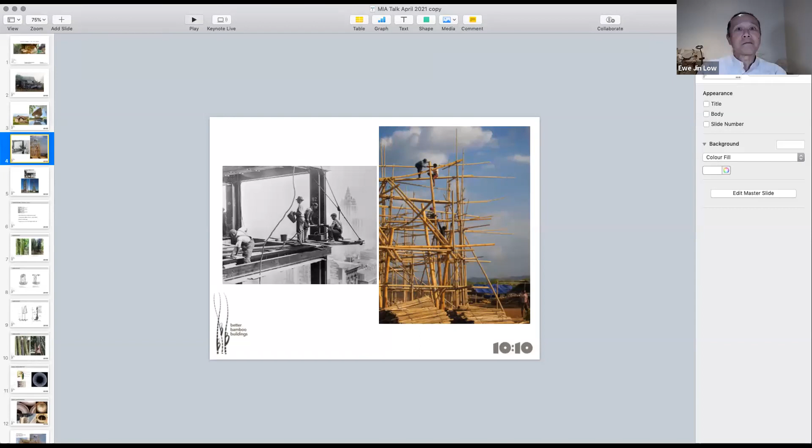I've had quite a bit of experience generally in the more conventional work in architecture, quite a lot of it. And my bamboo design journey started almost 6 years ago, so not long, but for bamboo it's quite long in general. So let me just go through this talk.

When we think of bamboo buildings, we think about buildings that don't last long. It's almost like poor man's timber. People think of bamboo as my grandfather's hut in the paddy fields that within 2 years will be rotten and dilapidated. So it shouldn't be that way.

I think attitude towards bamboo is changing a lot, and bamboo shouldn't be this hut that you see, but can be something like this where it's reinterpreted, it lasts longer than what it should, and it's beautiful.

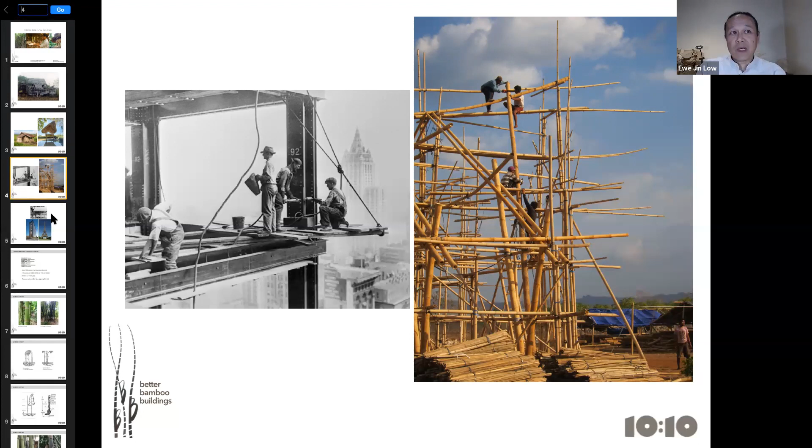Try and look for a bamboo book in any bookshop - it's very hard to find. So it is an emergent or re-emergent material.

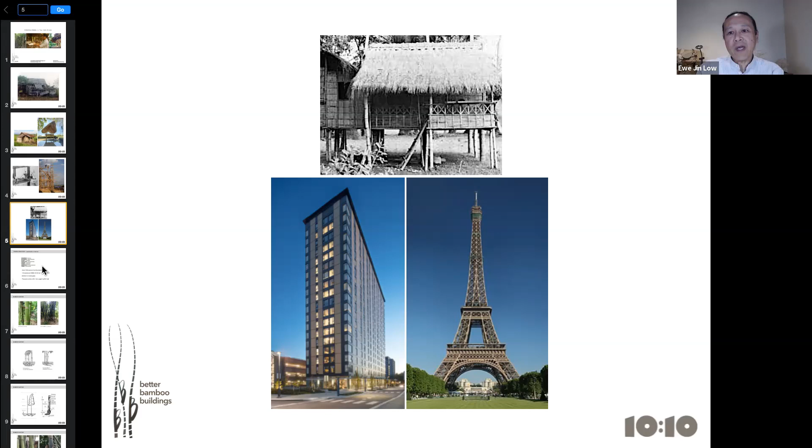A bit about bamboo in terms of what it is generally in the vegetable kingdom - it is actually not a tree, but a grass. Bamboo is a woody grass. There are about 1,500 species of bamboo around the world, and 120 are herbaceous, and quite a lot of it is woody, which means it can be used for timber. Some bamboos are short, 30 cm, and others are obviously like 30 meters high, which is 100 feet - that's quite high.

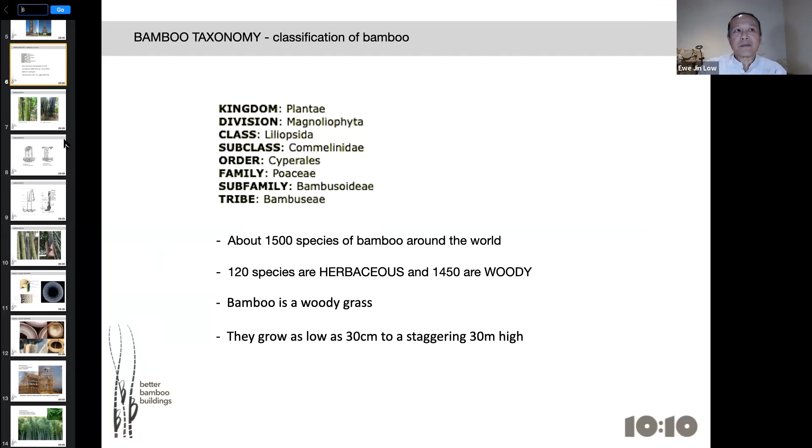So a bit about bamboo. This is a culm, or a pole - we call a pole of bamboo a culm. And when it's grouped together as a family, it's called a clump.

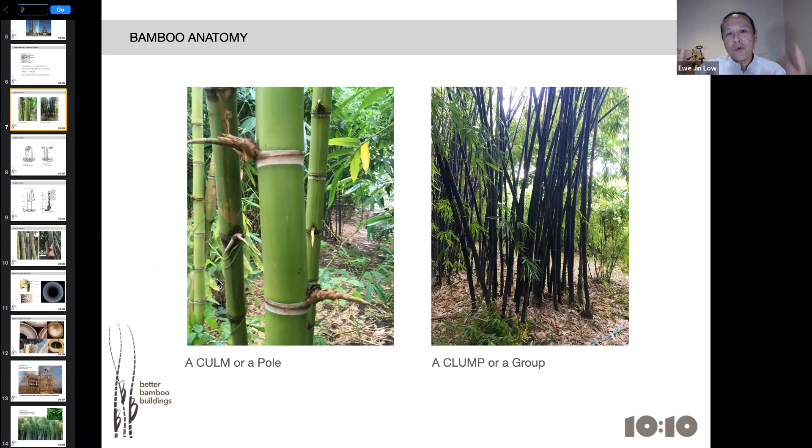There are two types of bamboo. There's clumping bamboo, which grows close together, and running bamboo, which goes wild - it goes under the ground, goes up even 20 feet away and comes up. So there are two types.

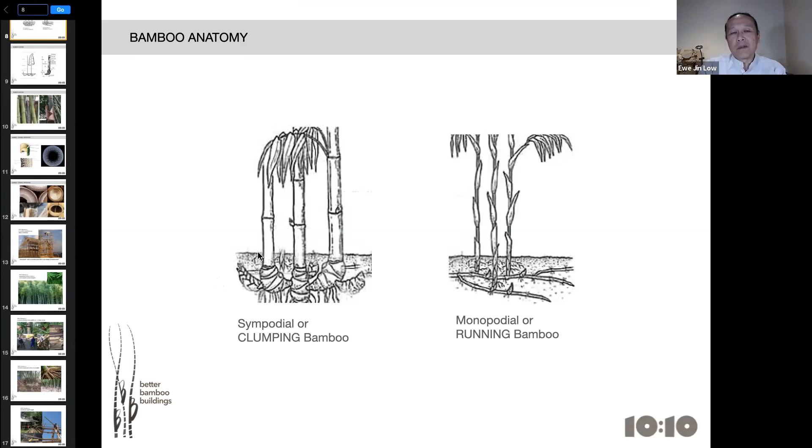A bit about the composition of bamboo. Going back a bit now - bamboo has roots called rhizomes. This is the bottom part and the middle part, and these two parts are where the bamboo is cut to use for construction. The top part is not so much. In between, we call them nodes - these are bamboo nodes, and there's a little diaphragm at each node.

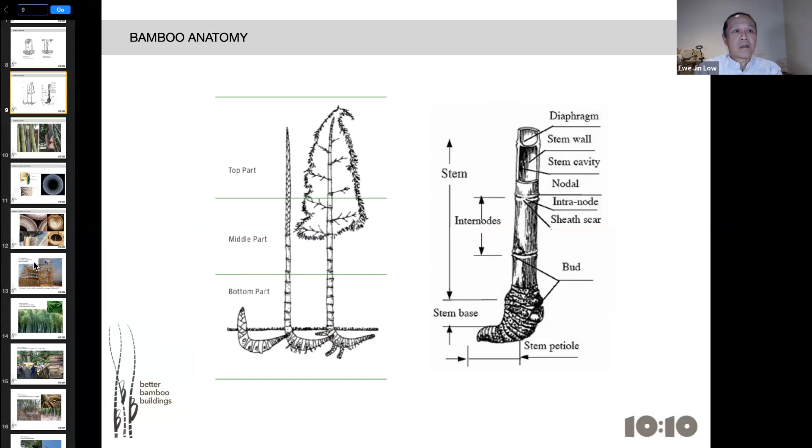The next part of the talk is really to go through and elaborate about why am I coming into bamboo of all materials. Bamboo is quite a worthy substitute for steel and for timber, not in all applications, but in some applications it is pretty good substitute. And I often ask students, how can we use bamboo in steel or timber applications? Think of that.

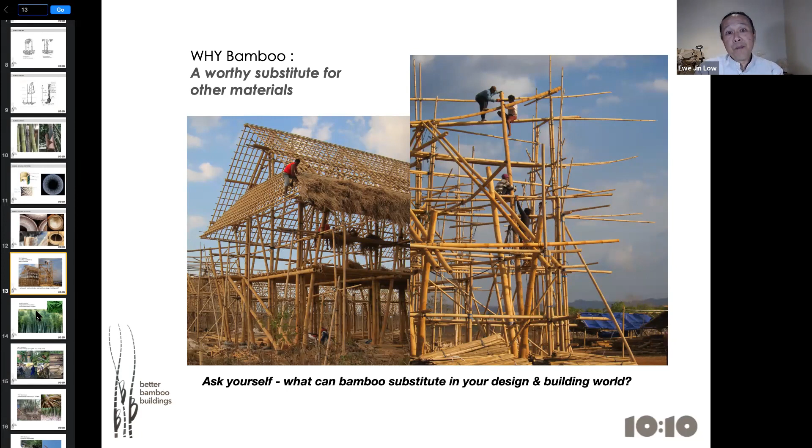Bamboo sequesters more carbon, grabs more carbon, and outputs more oxygen, kilogram for kilogram, when you compare it with timber. It really grabs - it's a good carbon store. It creates industry, creates business, and uplifts rural and non-urban areas, meaning from growing, harvesting, treating bamboo, from workers specializing in building in bamboo. It really uplifts poverty in many areas that I've seen as well.

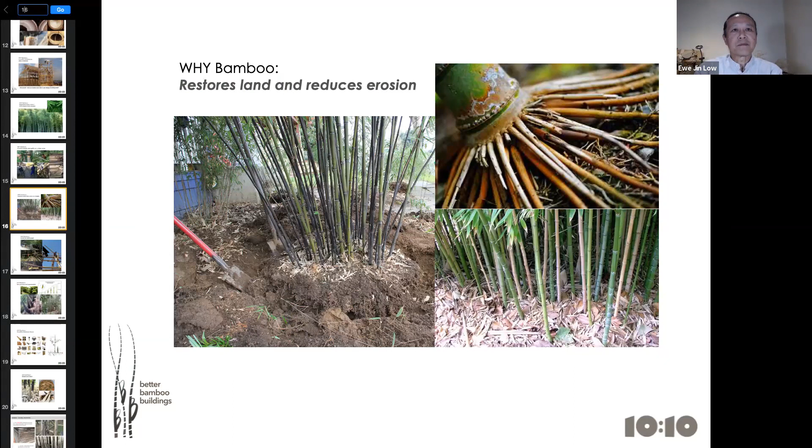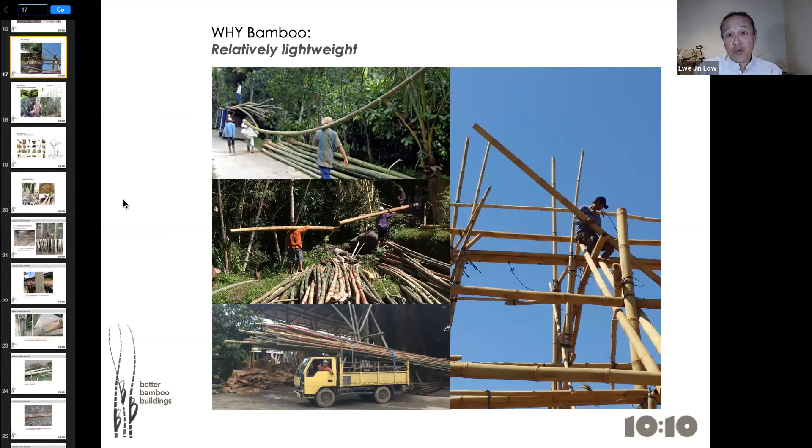Of course, bamboo is fast growing. It grows 1 meter a day for some species, and within 1 or 2 months is already at its full height, then it starts thickening up and getting stronger. It's got a very, very fast growth rate and is regenerative.

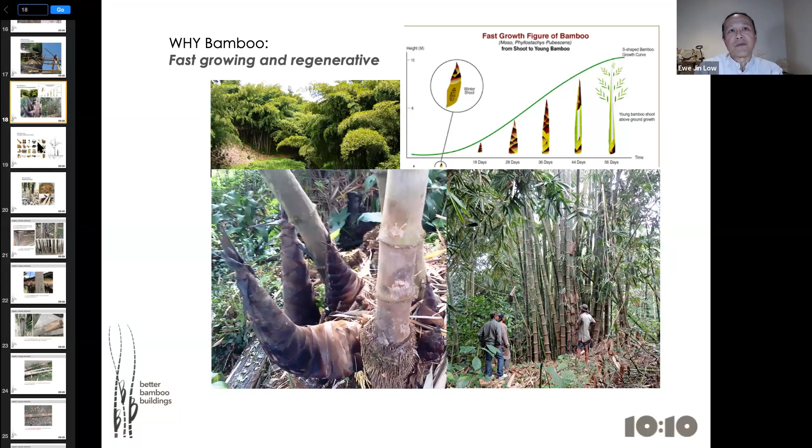Of course, it is versatile - it's got many, many uses, and every part of it, like the coconut tree, can be used. It is edible and tasty. For those of you who have tried bamboo shoots, you know - chicken curry bamboo shoot is amazing, tastes really good.

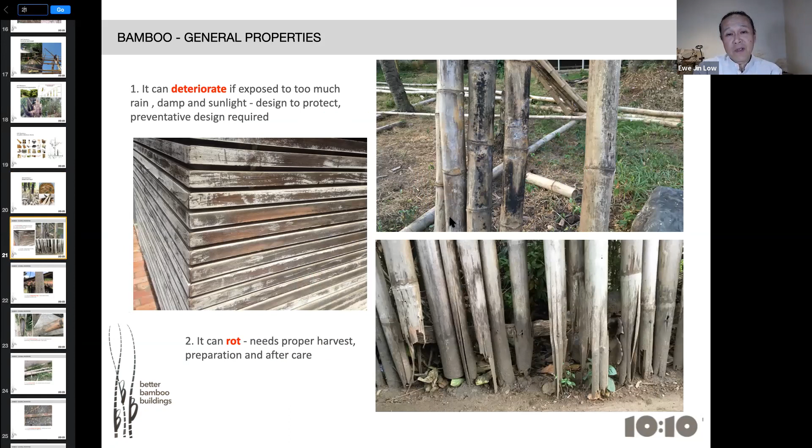It can be eaten by beetles and insects - they bore in and eat the insides of the bamboo, and within a year or 2, your bamboo building can collapse if you're not careful. So your bamboo needs to be treated - it cannot be used cut green and then put onto buildings. No, it has to be treated.

It is attacked by fungus as well. If you don't treat it or coat it, it can turn out quite bad, and your building or your installation can look really yucky. It can crack or it can shrink. It also can scratch. So you have to treat bamboo carefully.

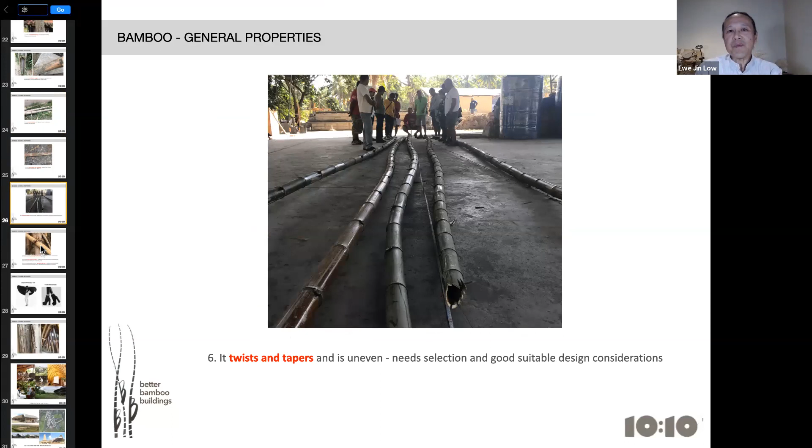As a building component, it is not always straight - it twists and it turns, so think about that when you design with bamboo. Sometimes when you harvest too early, or you harvest wrongly, it doesn't have the right strength to be built. So these are the precautions one has to take with bamboo, so that you're aware.

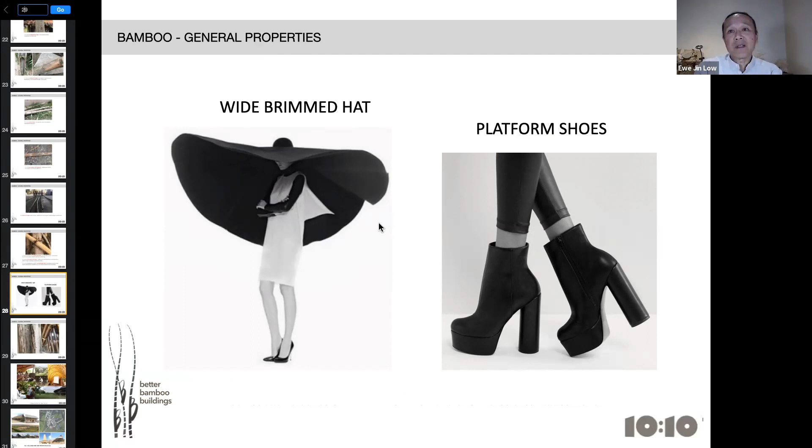When you design with bamboo, you need good preventive design, meaning you have to keep the water off the bamboo, keep the sun off the bamboo with a wide-brimmed hat, and keep bamboo off the ground and off water, meaning platform shoes to lift the bamboo up. These are basic principles of design for bamboo buildings, which I teach in my design course. If you do it right, you get nice bamboo that's protected and beautifully coated, lasting a lifetime. If you do it wrongly, you get insects eating it, fungus, and it rots.

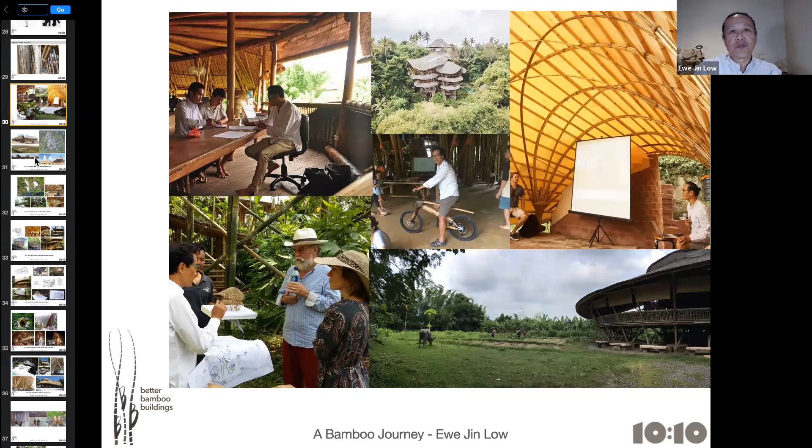Now I'm going to spend some time going through my bamboo journey. It started in Bali, where I joined a company called Ibuku, a pretty prominent bamboo design and production company. This is our office, with no walls, no cars in the car park, only buffaloes. I joined as lead architect and had a really good experience for 3.5 to 4 years working with them, designing schools and luxury houses from bamboo.

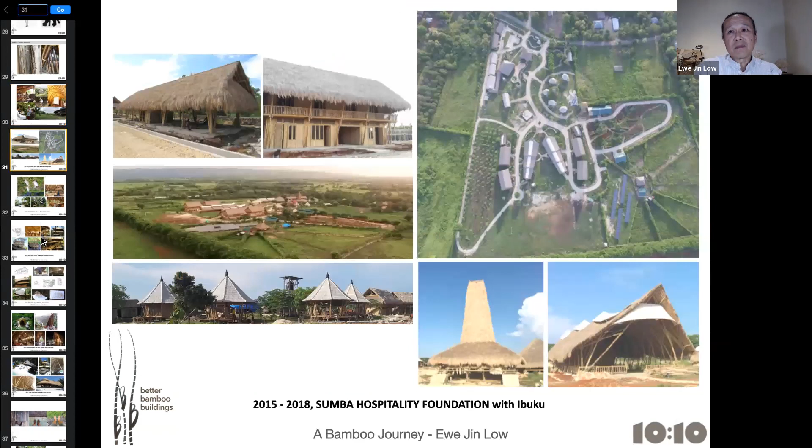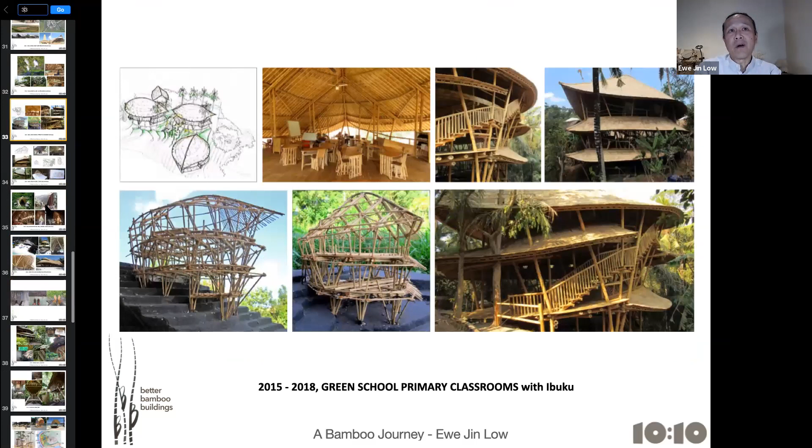These are classrooms in the Green School, going through all the buildings I was involved in. This is a science lab, all in bamboo, almost 100% bamboo.

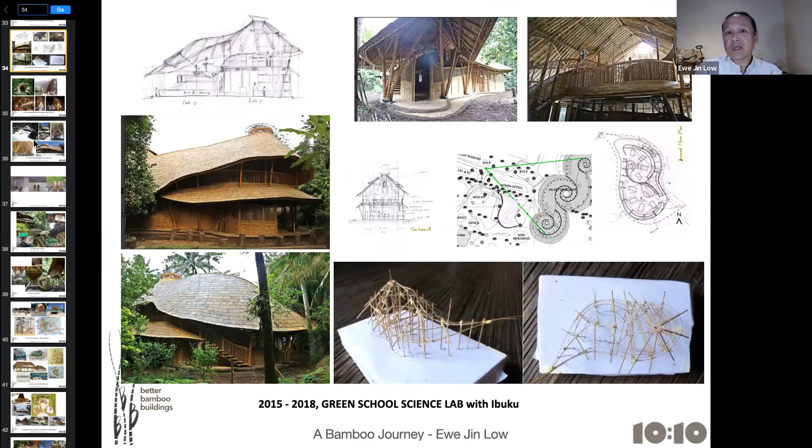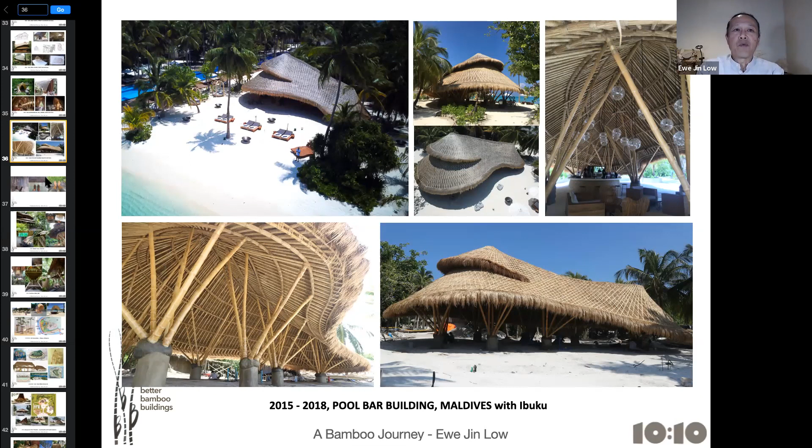I built our own house in Bali, which was a good experience. We still have it and someone is taking care of it, but we stayed there for 2 years. It's open, it's got no walls, we run a fan, we don't have an aircon. It's a very cooling, very permeable house.

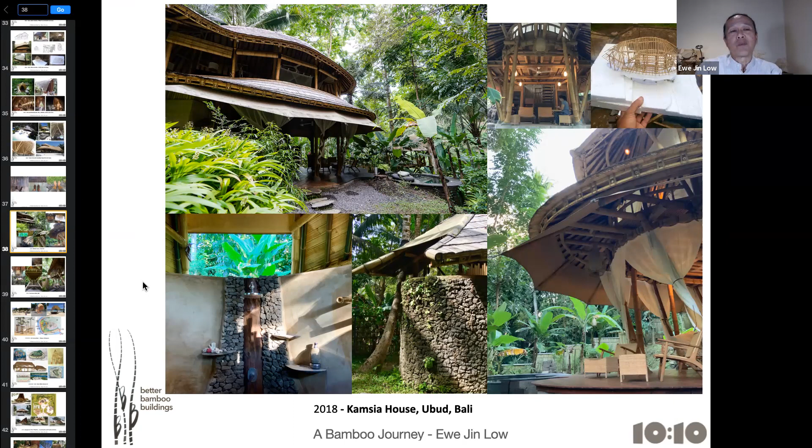Next to that house, we also built a tree house, again with no walls, overlooking a river below. A very simple building from the offcuts of the house.

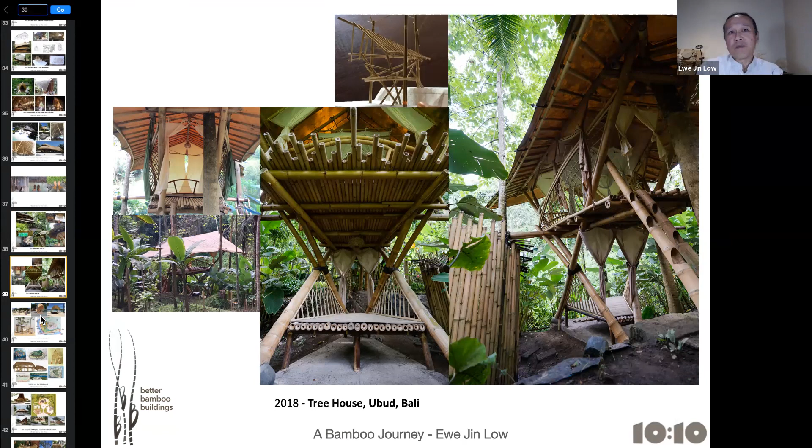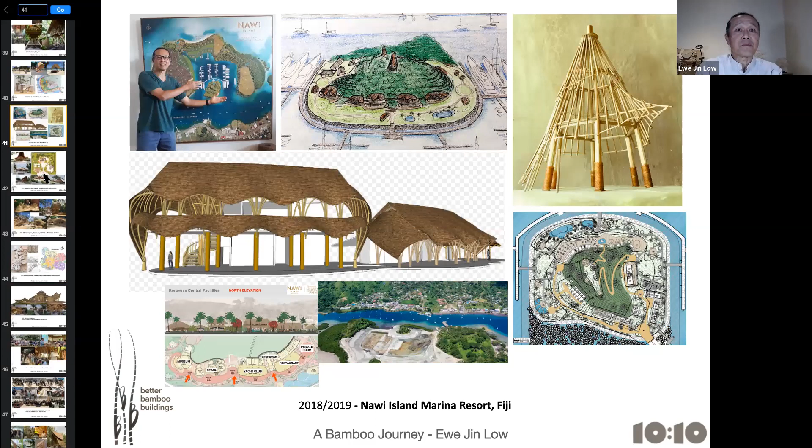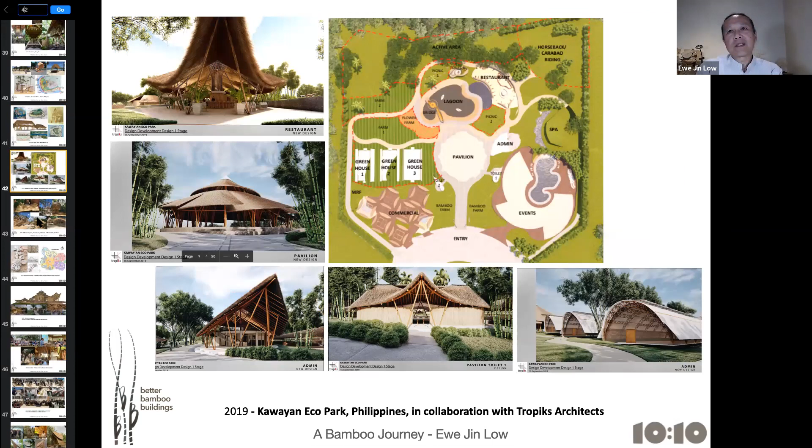In my work after leaving Ibuku, about 2.5 years now, I worked on bamboo resorts in the Philippines, some work in Fiji on a marina resort in bamboo, which was interesting. In the Philippines again, an eco park working with another architect, some resorts in Bali, small bamboo resorts, and a restaurant in Medan that's now going through detailed design.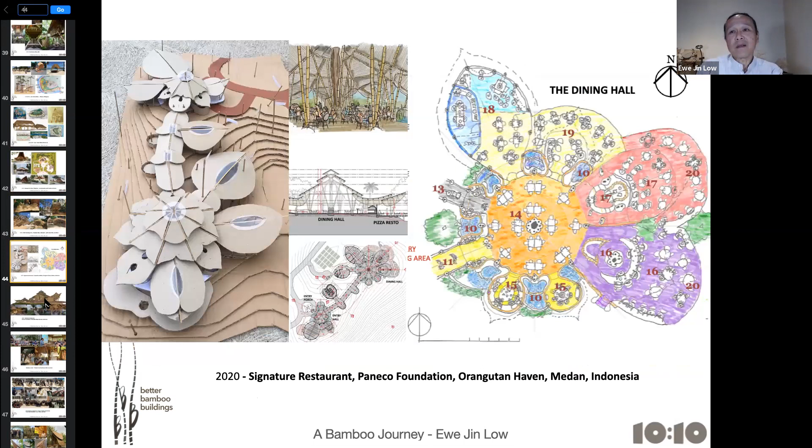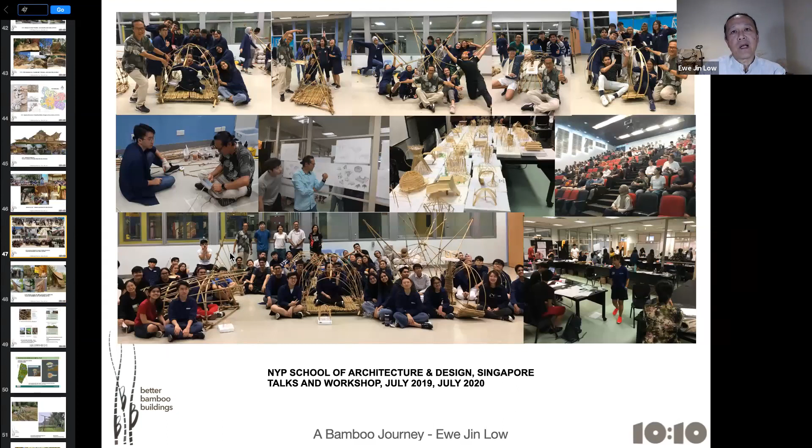I also teach. I began teaching at Bamboo U, quite a prominent bamboo learning institute now, and after 5 years it's grown a lot. I still help facilitate there, and I'm also involved in teaching at some universities here and there. As Nicholas mentioned earlier, I went to the KLAF Festival and was invited to build this pavilion in 5 days. It was quite a challenge, but we built it with volunteers and Balinese workers I brought over with me from Bali. It's up there at APW in Bangsar, so if you're going for coffee you can see it.

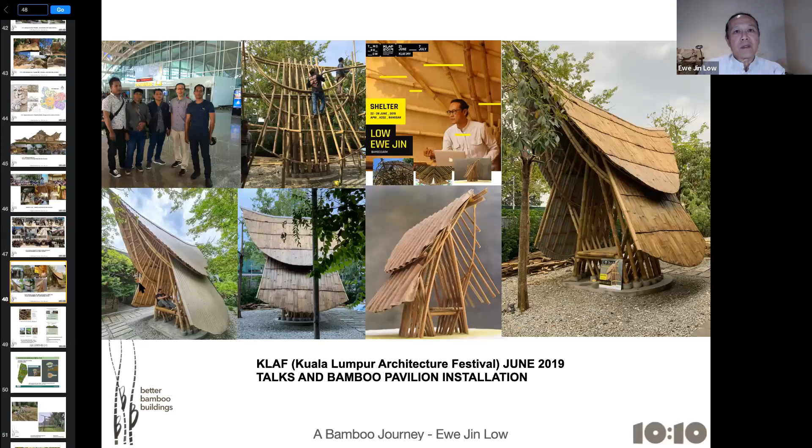Just some of my channels, Instagram, 2 Instagram channels, and a blog, Better Bamboo Buildings. If you want to come and visit, it'd be great. Read more bamboo articles there.

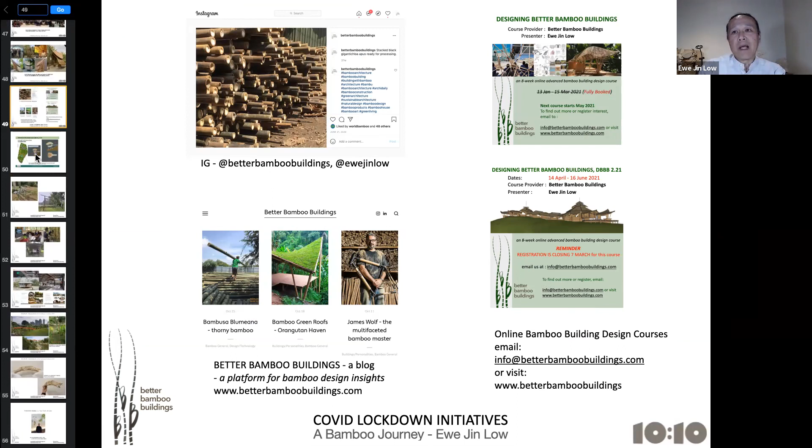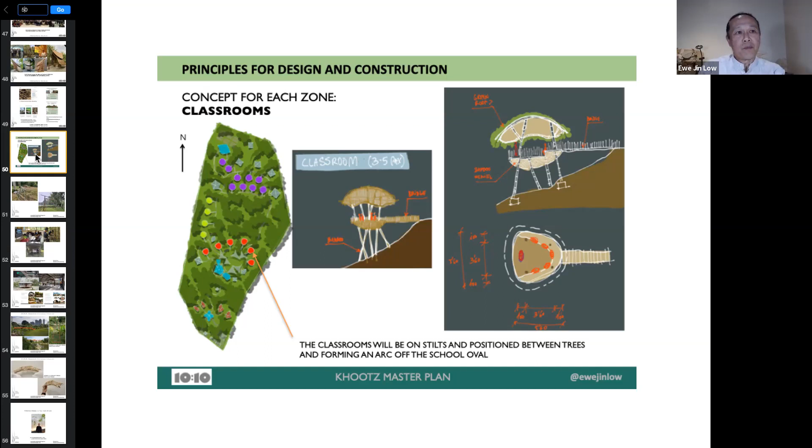A bit more about Malaysia now, bits and pieces. I think after the KLAF Festival, I got more involved in projects in Malaysia. This is a master plan for a jungle school in Sabah, quite interesting, a big piece of land, and we produced a master plan for them. We started looking at bamboo and a pop-up hut, which they started, but everything slowed down after COVID. This is in Tambunan, near Kota Kinabalu, talking to the villagers, checking out the bamboo as well. That was quite an interesting process.

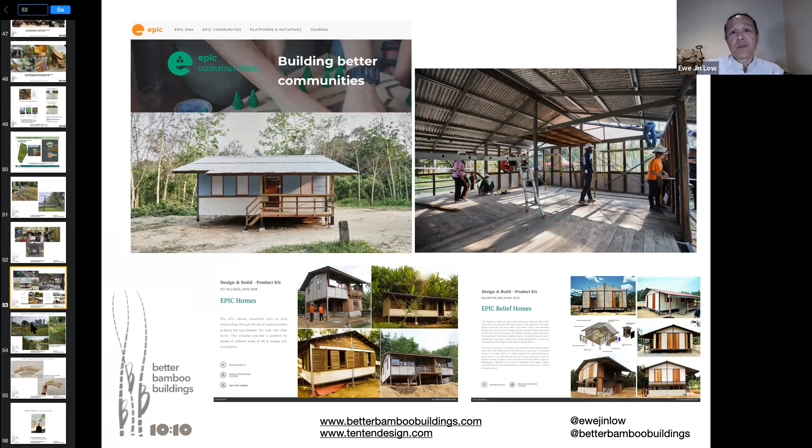I've also been involved with EPIC, which some of you will know. Still working with them trying to get bamboo into their projects, especially some of the Orang Asli houses. I'm very interested in finding avenues for bamboo to get into projects like theirs at EPIC. Looking at building a bridge in Keramat, this is one of the designs, the current design for the bridge for the moment. It's a 30-meter span.

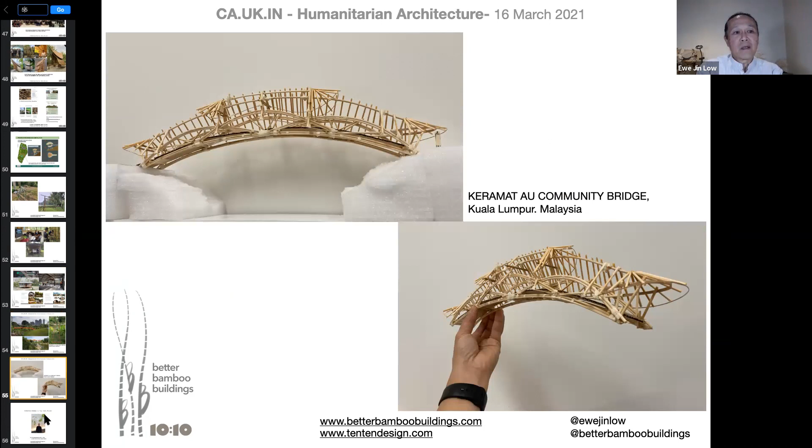So yeah, that's it generally. I hope it's not too short or long. How long did I take? About 20 minutes? Yeah, okay. So, short and sweet. Thank you, Ewe Jin. No props.

We have some questions in the chat, so maybe we can start our Q&A immediately. Thank you so much, Ewe Jin, for the sharing. I think the first question, from Nicholas, which we also talked about during our pre-run session: you mentioned you started your bamboo journey after encountering Ibuku in Bali, but before that your background was in housing, especially overseas. So how did that career change get initiated?

I just applied for a job. I saw a job advertised and applied for it. Although I wasn't really in a position to apply, I was already thinking about how I could retire in 6-7 years time. But I applied for it. The job was calling me, I don't know why, but I applied. After many interviews, 6 interviews and a trip there, I decided to join them. Even my staff interviewed me before I joined. It was a tough process to get selected, but good thing I did. I think it took me to a different level.

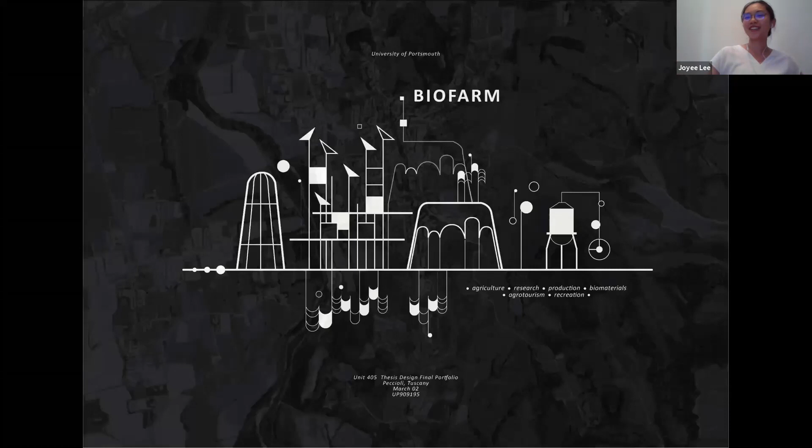Before I start, I would like to thank Joyee and Clarissa who invited me as one of the speakers. This will be the first time I'll be sharing this project, because due to lockdown I haven't had the chance to present it to our tutor.

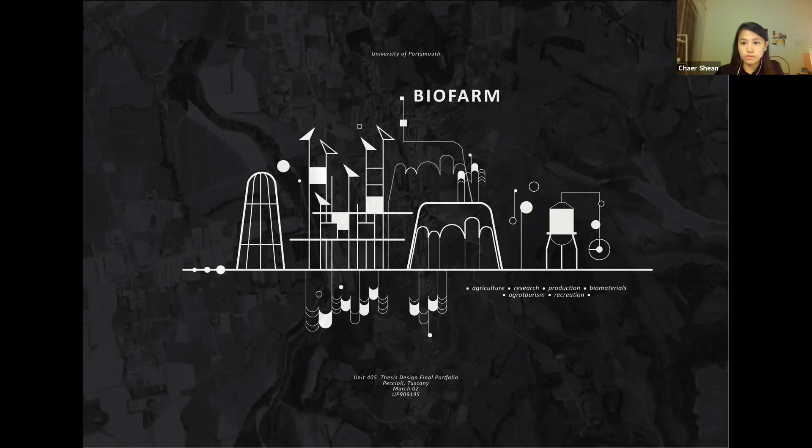Before going into my final design proposal, I will share some research analysis, the research question, design processes, and lastly my design proposal.

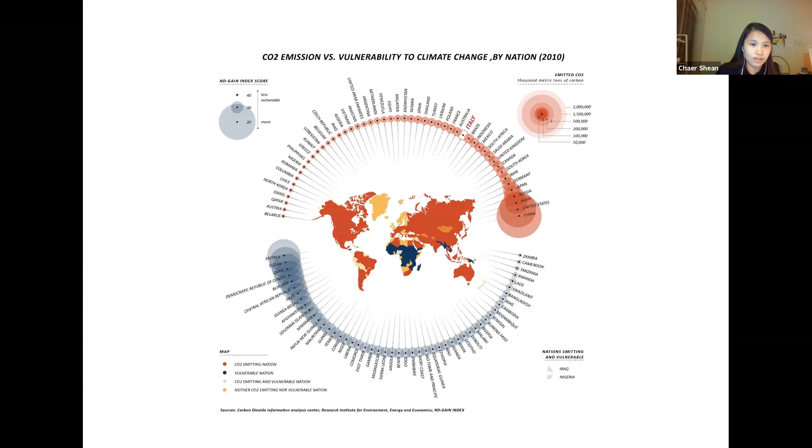In recent years, climate change has been the biggest challenge in the world. It happens due to the high amount of carbon dioxide emitted. From the diagram, you can see 200,000 metric tons of carbon emitted in Italy, where the site of the proposed design is located. Italy actually has quite a high number of carbon dioxide emissions compared to other countries shown below and on the left.

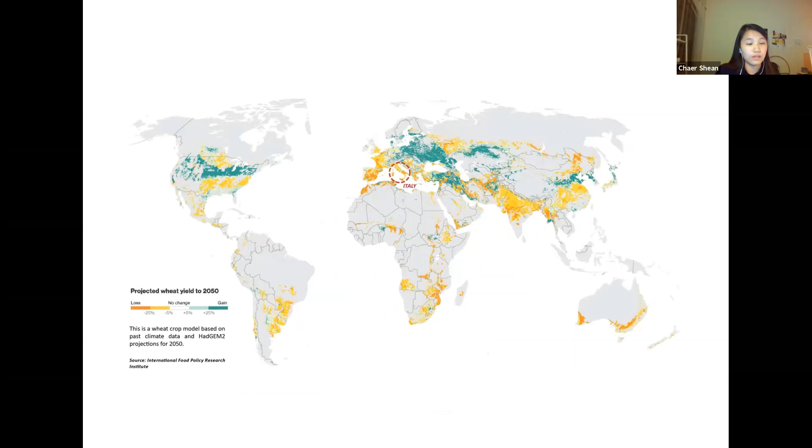So this triggers me to research on agricultural waste, and agricultural waste is divided into 4 main categories: crop waste, animal waste, processing waste, and hazardous waste.

I've done some research on the global waste composition and found out that food and green waste holds the highest percentage, 44% of waste globally. If the waste were not being treated well, it will lead to a high emission of carbon dioxide that leads to climate change, as mentioned before.

Therefore, in the following design proposal, I will be looking into how agricultural waste could be potentially transformed into something useful or environmentally friendly in the built environment.

So the site that I was working on is in one of the towns in Italy, Tuscany. Tuscany is located in the west central of Italy and has the highest value crops, for instance olives, orchards, and vineyards. Tuscany has the most popular area of agritourism in Italy, where 20% of all farmstay business takes place in Tuscany, according to Italy's National Institute of Statistics.

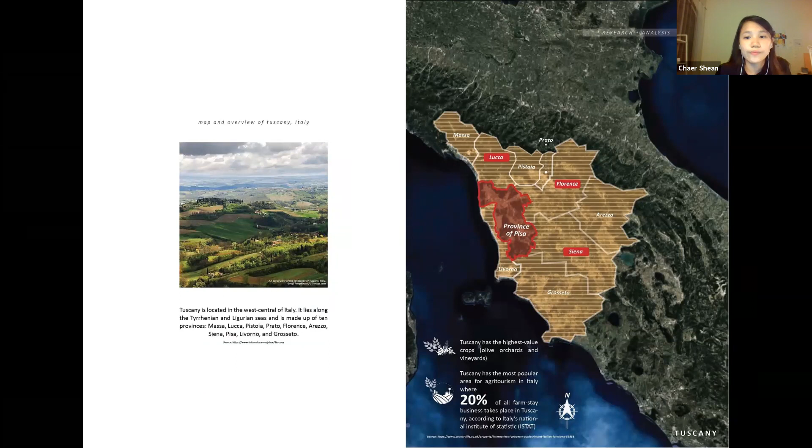So the selected site for this proposed scheme is in Peccioli, a small medieval town in the Tuscany region. International travelers who intend to visit Peccioli will arrive in Pisa and take approximately 45 minutes drive to the town.

So this is an image that I've abstracted from what I researched about the chronology of Peccioli. The town of Peccioli has the characteristic topography of medieval villages, narrow streets, steep lanes, and churches in the Pisan Romanesque style. The town has lots of this gigantic statue that was brought up by a waste management organization, called Belvedere SpA, that represents a new life that can be born from waste.

Peccioli has also received the orange flag for quality and ecotourism reception.

After some global analysis about the site and looking into the territorial analysis, I mapped out all the data collected from the research and overlapped it into the analysis map, which concluded that Peccioli is a small town where most of the activities and facilities were concentrated at the heart of the town and slowly dispersed out to the surrounding area.

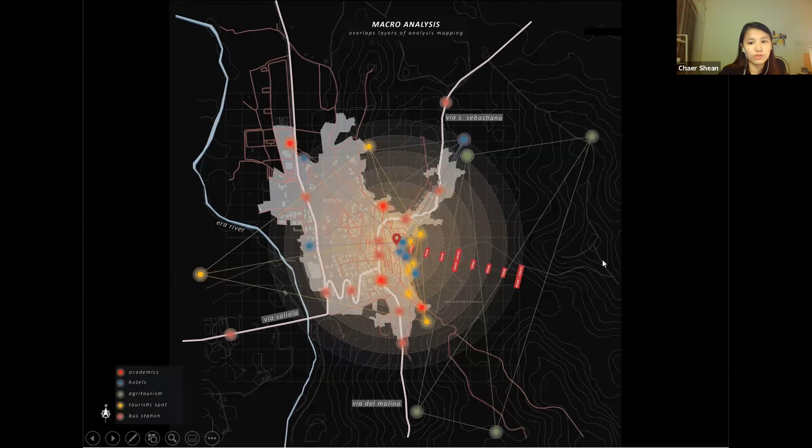Looking into the land use of Peccioli town, most of the land was being used for agriculture production, and the main economy of Peccioli is based on agriculture, for instance wine and oil, livestock management, and the agritourism sector. There are 6 different productions around the site: grapes, wheat, olives, sunflower, corn, and ham, located further out from the town.

So Tuscany is not only well known for its landscape, historical and artistic beauties, but also known as the land of robots. They have tested out this technology called the dust bot, where it goes around the neighborhood to collect all the waste. This is the map of the road showing the dust bot collection points.

They have also come up with some robots for agriculture and food production. In agriculture and food production, the robots were used to automate the entire process from raw materials to end products, for instance from grain to flour to pasta, or from fruits to beverages. The robots were also used for precision farming, to automate cleaning of barns, harvest, and grooming. These robots have been used in other biofarms around the town.

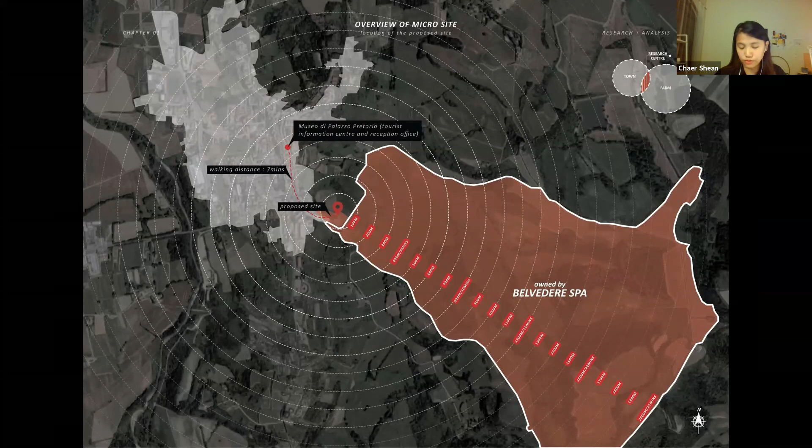So the proposed site for my main program is located right in between the city center of Peccioli and the agricultural land, where visitors can access the site from the city center to the main proposed site within walking distance.

Moving into the research questions of my project: I once thought that organic production nowadays is getting more and more expensive, but Italians are still willing to spend for good quality products as they seek fresh and organic food production. In that case, I questioned myself if I could research on how agricultural production could contribute to strengthening organic food production, and if agricultural waste can be transformed into biomaterials as new construction materials in the future.

So with that, I've done a small experiment with some agricultural production, for instance grapes and cornstarch, to test if they could transform into new potential construction materials that could benefit the environment.

This experiment is done with the inspiration of the Hy-Fi Tower, an organic compostable tower designed by a Brooklyn-based design practice called The Living. In this project, the entire design of the tower was constructed by organic and biodegradable bricks made up of agricultural waste like corn stalks and mycelium.

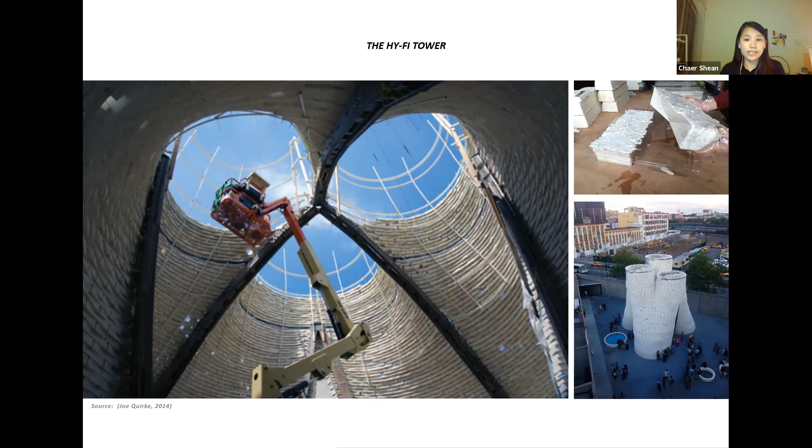This innovative technology, the usage of agricultural byproducts, was quite often used in food and product packaging. However, the Hy-Fi Tower is considered the first large-scale structure to use this innovative mushroom brick design.

So apart from the Hy-Fi Tower, I also got inspired by the Growing Pavilion. This pavilion is a temporary event space at Dutch Design Week, made entirely from mushroom mycelium, a bio-based material. The panels were supported by timber frames.

The idea of this Growing Pavilion started from mushrooms, which slowly grow bigger to cover up the facade of the pavilion. So everything in this pavilion is built from plants, trees, and agricultural waste.

These two projects adopted the principle of cradle to cradle, where the tower was constructed by organic materials which can be composted when it reaches the end of its life, and when the dismantled product cannot be reused, the composite substances return to nature as organic nutrients. This process is called closing the loop of resources.

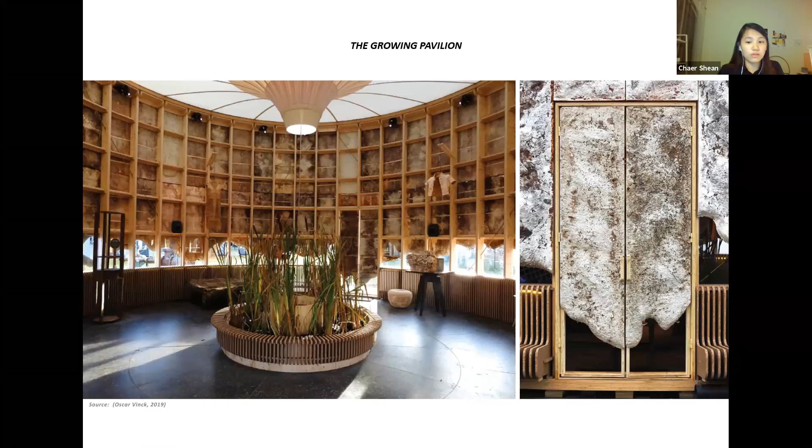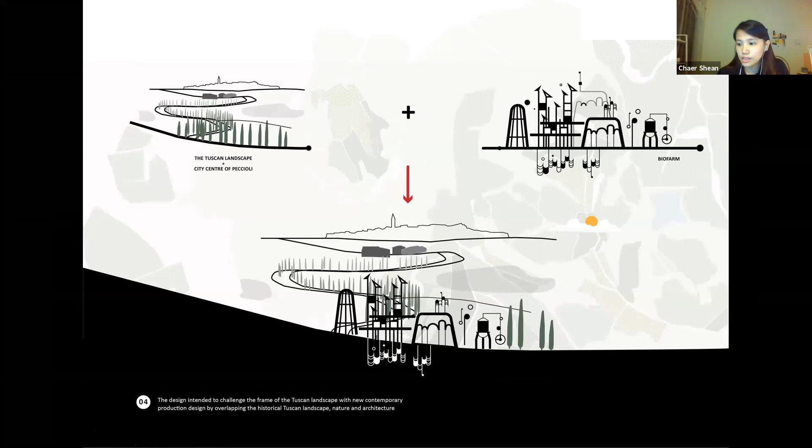The other intention of the development is that each point of the different functions are sustaining one another, by having a biogas plant that generates energy from collected agricultural waste to sustain the entire system, and a water collection and storage area that could supply water to all modules. Lastly, the design is intended to challenge the frame of the Tuscan landscape with new contemporary production or industrial design by overlapping the historical Tuscan landscape, nature, and architecture.

So going into the design process, this shows how I've come up with the final product of the design.

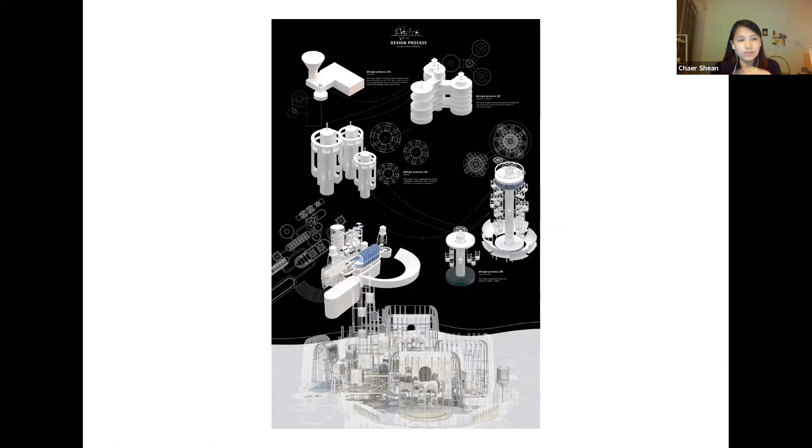I started off with three basic forms: the traditional, the radical, and the in-between, or vice versa. I further developed the radical form, which would be formed by a few modular pods vertically, and this drove me into having all the different functions in a modular system going horizontally instead of vertically, because of the big piece of agricultural land.

The development for this phase is formed by 3 main programs: the biogas and biomaterials production area, social spaces, and infrastructures and amenities.

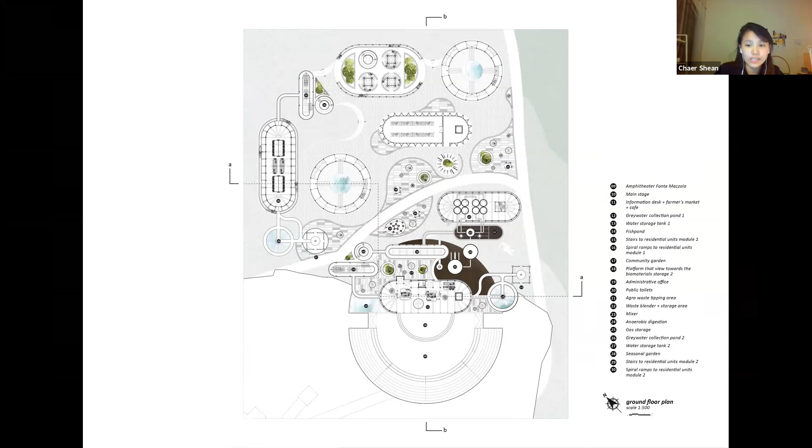This ground floor plan shows that this development is basically designed in a modular system, where each module of different activities is sustaining one another, which will be explained shortly.

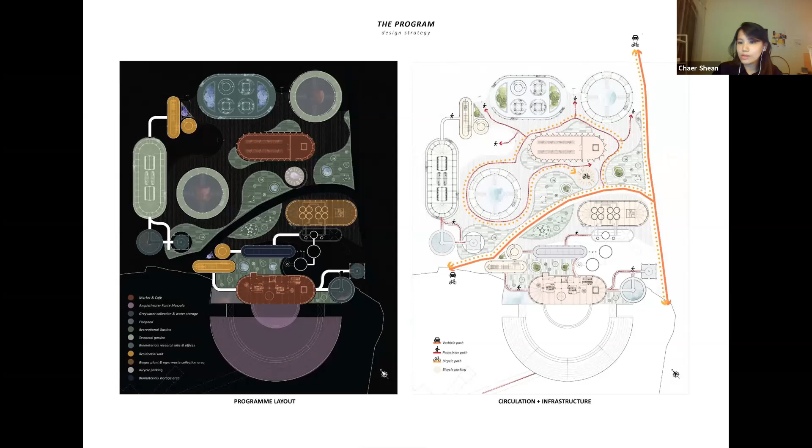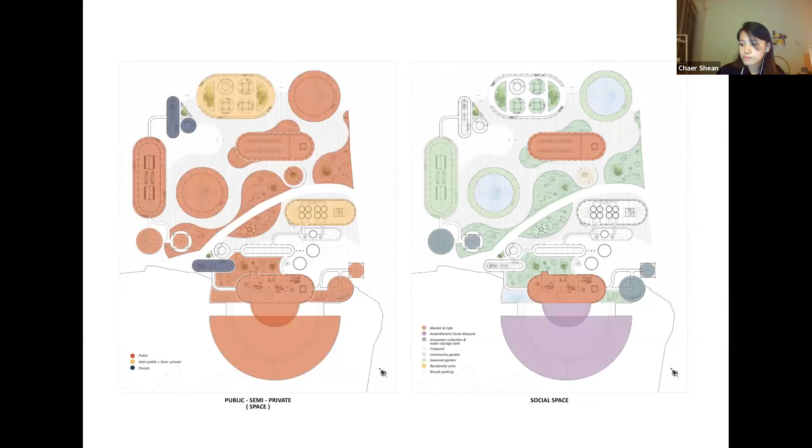With other programs like social spaces - public, private, and semi-public spaces - there will be a water sources area, green space, and food production area that form the development.

I'm going to explain all the modules that form the first phase of the development. There are 9 different modules of different functions, categorized into 3 categories: community, waste research and production area, and amenities.

This is the first module, where I have the main stage, information desk for agritourism visitors, farmers market, and cafes. In Italy, they have a culture of watching performances in a theater or outdoor amphitheater. There is an existing amphitheater on site, called Amphitheater Fonte Mazzola, which I included as part of the program to act as a welcoming space for visitors to explore.

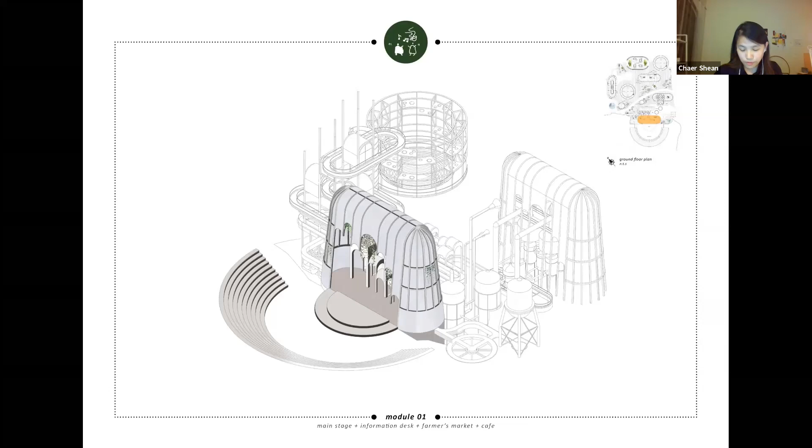With the beauty of the historical Tuscan landscape and the new contemporary production design of my project, it will act as the background for the performance stage. So there are a few plans and sections to show this first module.

I will further explain the indoor vertical farm I have underground. This proposed scheme tests how agricultural production could contribute to strengthening organic food production, so indoor vertical farming is proposed as part of the design. This vertical farming allows leafy greens to grow without sunlight or soil.

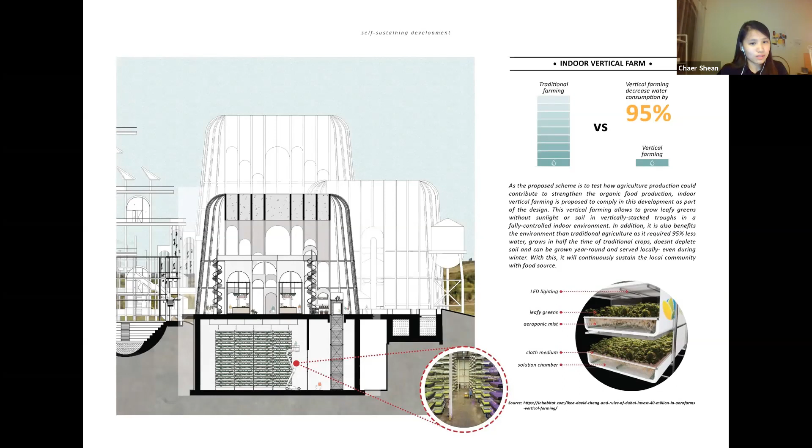It also benefits the environment more than traditional agriculture, as it requires 95% less water, grows in half the time of traditional crops, doesn't deplete the soil, and can be grown year-round and served locally, even during winter. With this, it will continuously sustain the local community with a food source.

Moving into the second module, the seasonal garden, it acts the same as the vertical indoor farming, but is designed to produce a wide range of food production - fruits and vegetables - for home consumption, cafes and markets, ensuring a year-round yield.

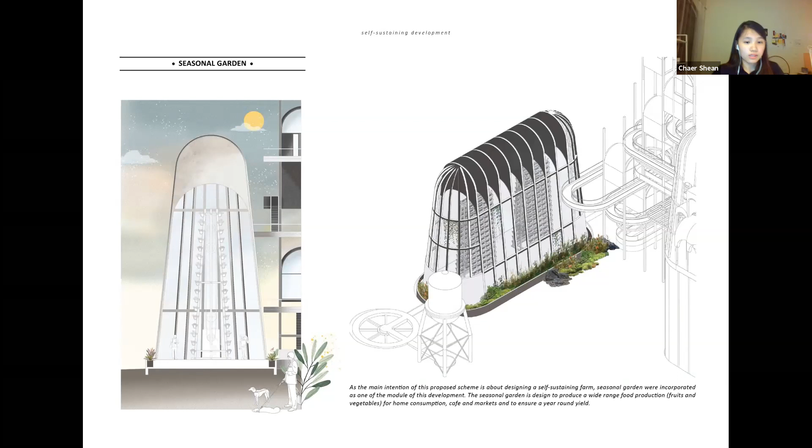There are also fish ponds and communal spaces where they produce a wide range of protein sources for the users or visitors of this development.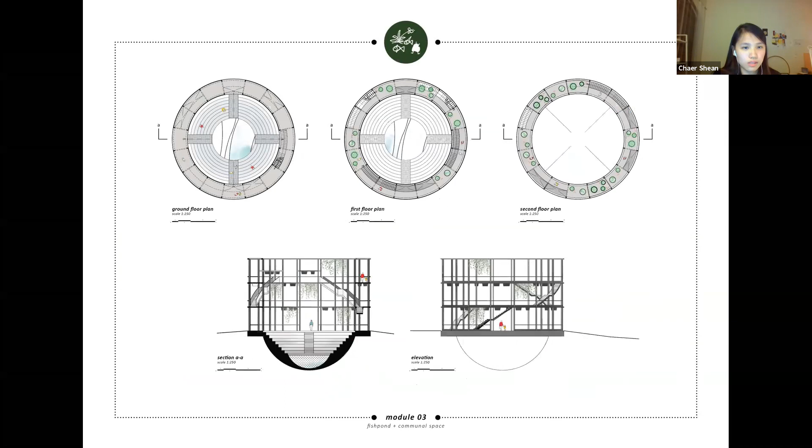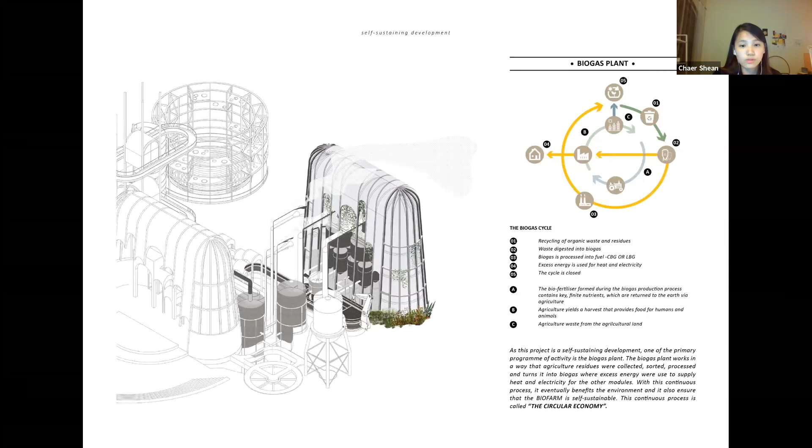There is also a biogas and agricultural waste tipping area, where agricultural residues are collected, sorted, processed, and turned into biogas, with excess energy used to supply heat and electricity for the other modules. With this continuous process, it will eventually benefit the environment and ensure that the biofarm is self-sustainable. This continuous process is what we call the circular economy.

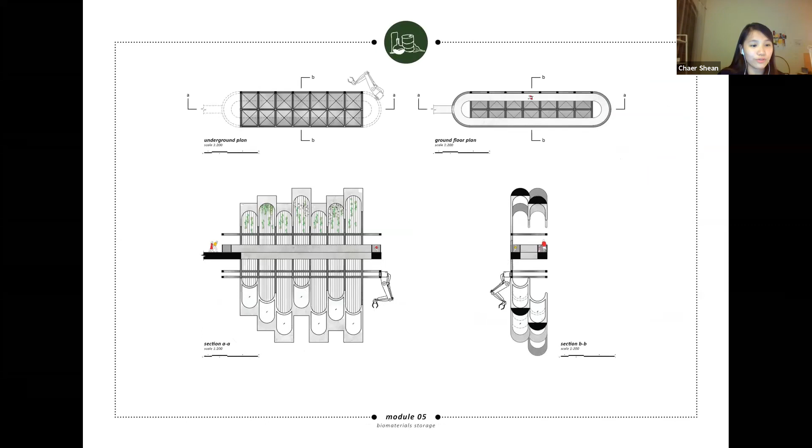There's also a biomaterial storage area where all the raw materials are being stored and used for experimental purposes, along with research labs and offices for the experiments to take place.

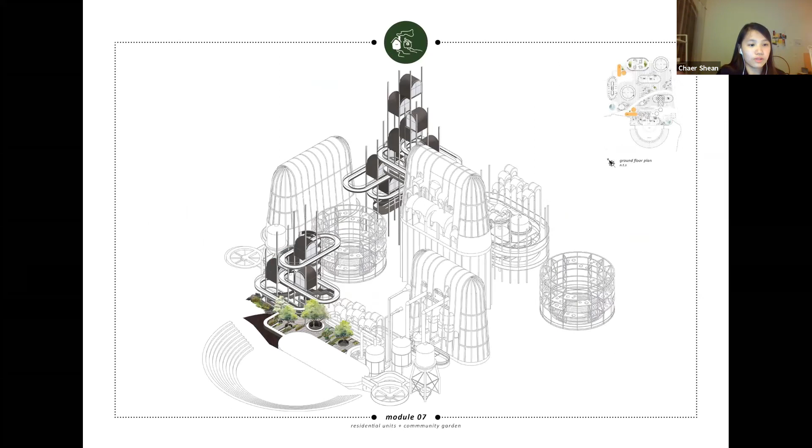Residential units and a community garden are designed for the users, the workers who work in the office or the production center to stay. The residential unit is also designed in a way that complies with the PV glasses, so the PV panels distribute surplus energy to other modules while providing energy to the residential part.

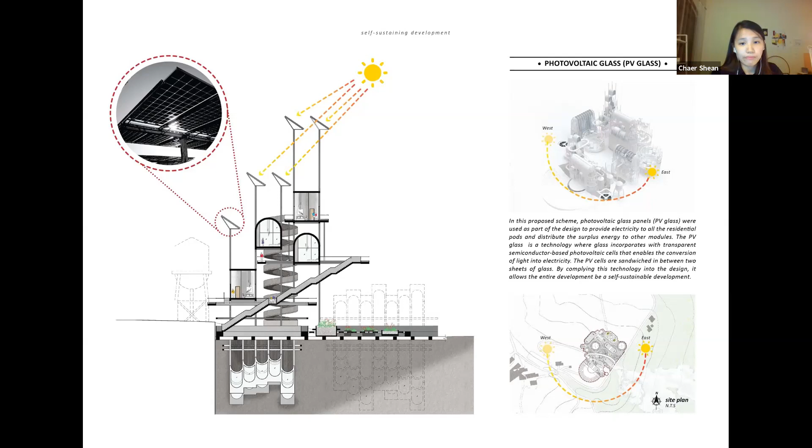These are a few plans and sections of the residential units, and as you can see, the residential units are designed in pods, which will be grown in the future.

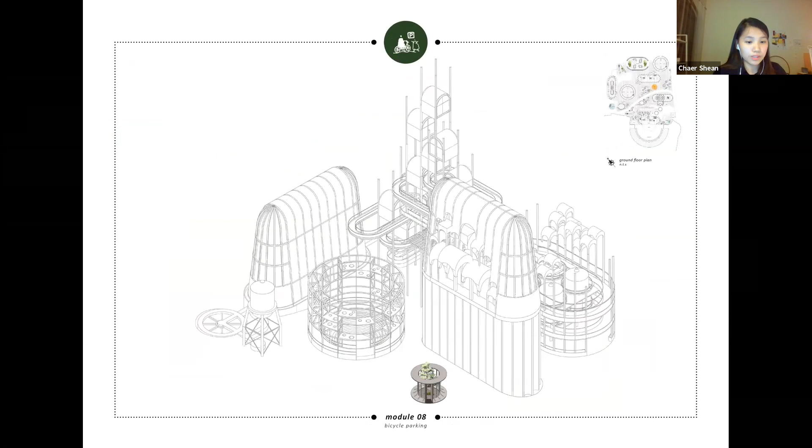There's also infrastructure facilities like bicycle parking, as well as the grey water collection area and water storage tank.

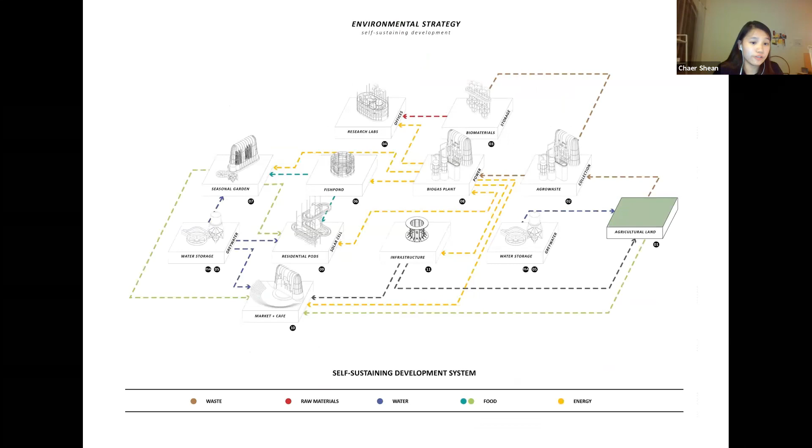So the entire development of my design proposal is a self-sustaining development, where all the waste, water, food, as well as energy are circulated to self-sustain each module of different function.

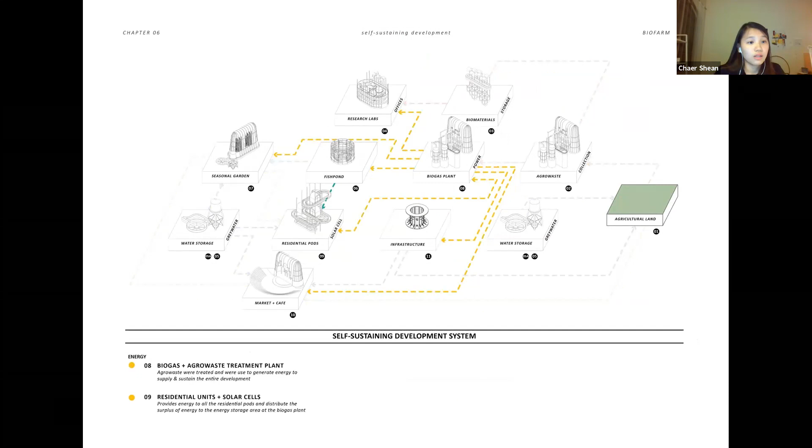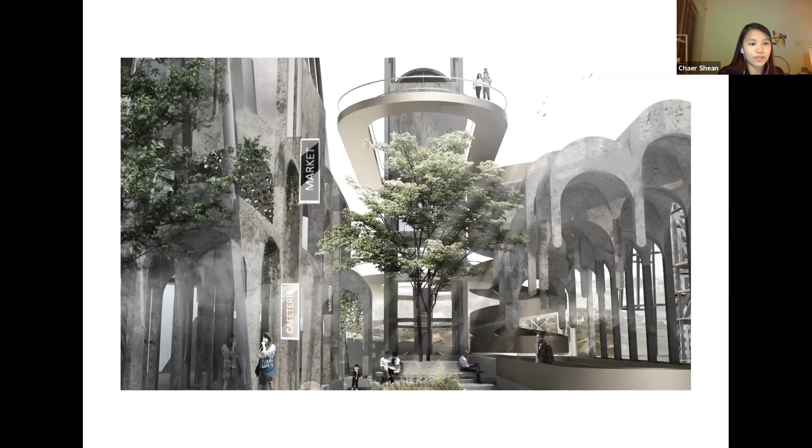These are a few perspectives of the Petra Lee biofarm. I would like to conclude that this is a project that focuses on experimenting with a self-sustaining ecological system in agriculture, and meanwhile testing out different types of bio-based materials for future construction use.